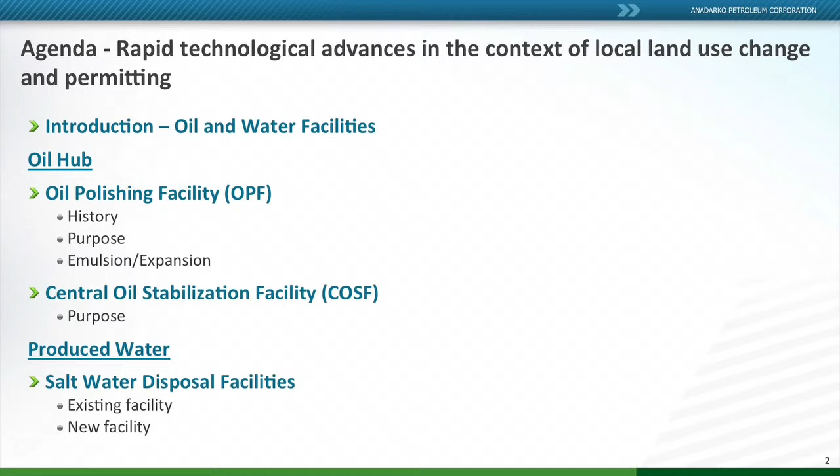Second topic I'll talk about is the central oil stabilization facility. That's a site that's currently under construction right now, and it's one of those big facilities that's helping us be better neighbors, better producers, so our tank batteries become smaller, more efficient, no VRUs, and a lot less emissions. Great story there. And I'll talk about our produced water system. We've got an existing facility as well as a new one, and some of the new technology we're bringing into each one of those three.

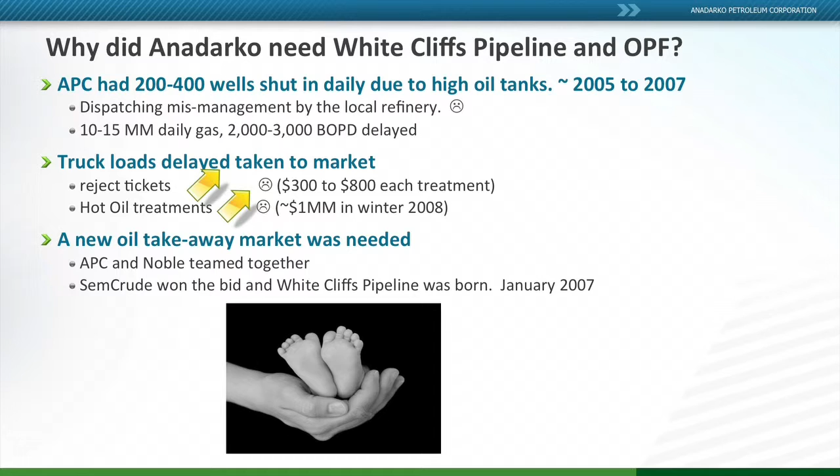So why did Anadarko need a White Cliffs pipeline and an oil polishing facility? Back in 2005 to 7, we had a bunch of wells that were shut in because the local refinery wanted to have control of trucking this oil, and all they did was come up with excuses on why they couldn't haul that oil. Cost us a lot of money, a lot of shut-in production. So us and our counterpart Noble came up with the idea that we need a better way to get our oil to the market. So we went out to bid, and the idea of the White Cliffs pipeline was born back in 2007.

So what the oil polishing facility does: when the trucks offload, about 10% of it doesn't meet the spec that has to go into the pipeline. So we divert it and bring it back to polish it. Basically, the bad actor there is just a little bit of water, especially in the wintertime when it was cold. We're talking about trucking oil right now, but remember this is back in the 2007-8 time frame, and since then we've eliminated a lot of trucks. I'll get to that later.

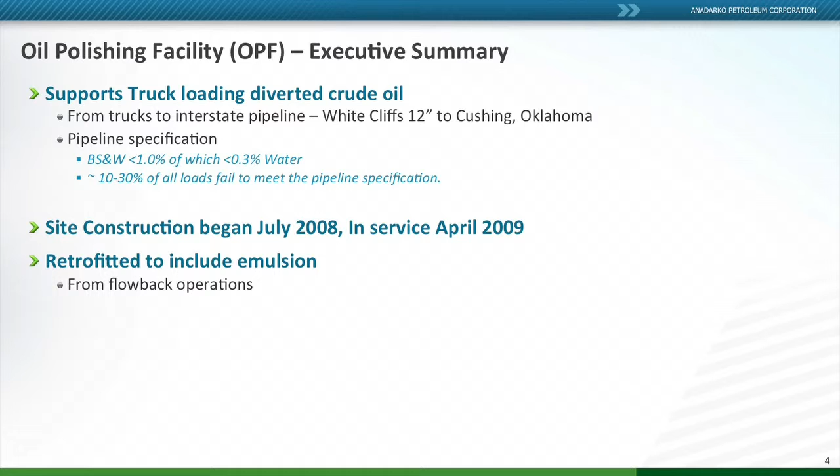So the pipeline spec is no more than 1% BS&W, which can be no more than 0.3. That's kind of tight, but when you've got some paraffin in there and you've got cold weather, you just can't get that water out of it. So we began the construction in July of 2008, got online in 2009, and the facility itself has been working fine.

We wanted to do a retrofit to it because we wanted to bring some emulsion in from our flowback operation. When you frack a well, you get that water that's coming back, and that's what we call the flowback process. And inside there's a little bit of oil and emulsion. Previously, we were taking that to a water disposal facility, and they were charging us to take it as well as skimming the oil and making money from that. So we decided to retrofit one of our sites.

Kind of a complicated flow diagram here. The trucks show up, they offload, about 10% is out of spec. We process it and then we pump it back into it.

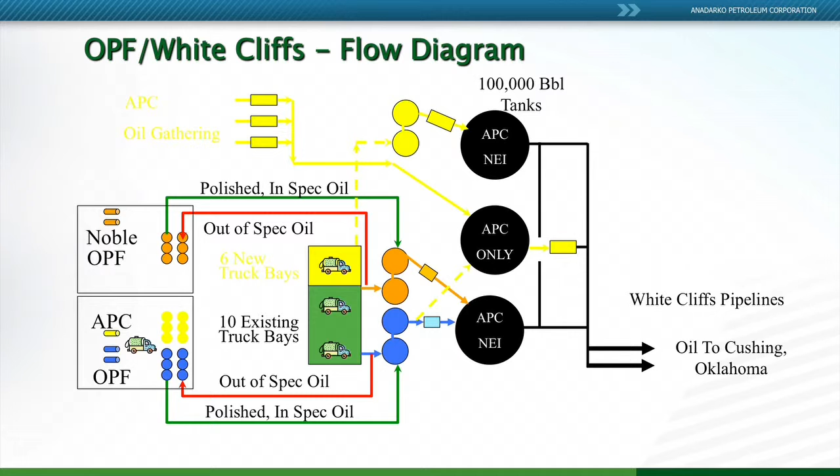And currently, right now, our oil is being pumped to Cushing, Oklahoma through 2 pipelines. We also have a railroad spur. I didn't show it up here. And then as the horizontal program came on, we knew we had to have a better takeaway, a better way to get our oil to market, and that was through an oil gathering system. So currently we have over 150 miles of anywhere from 8-inch to 12-inch trunk lines that gather our oil, and that's been a great story as well. I'll get to that a little bit later.

Noble has a sister site just like ours, and it's called an oil polishing facility as well. Just a couple of photos here. Here's some water tanks, and they're fiberglass. So a lot of this is not technology. It's good use of what materials are out there for us to use. We want to use fiberglass so we don't get corrosion, because this produced water in these tanks can corrode. We don't want leaks or spills.

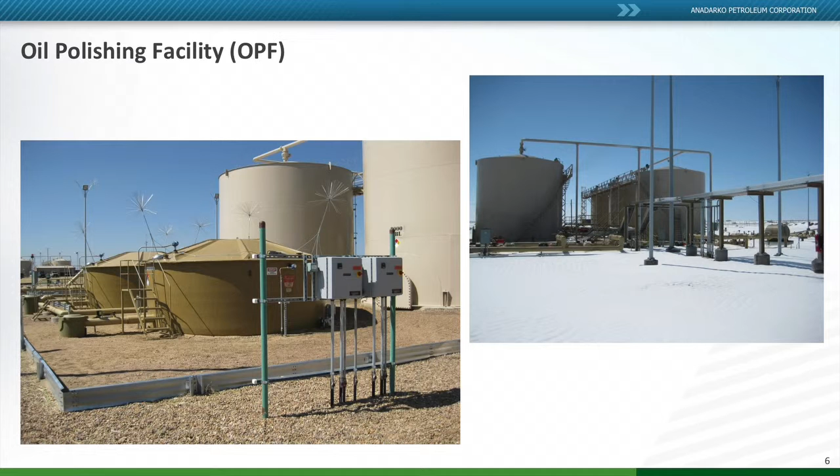With that, though, with hydrocarbons inside plastic, you can get some static and you can get some fires, so what we do is we put a really robust system in place for the grounding and also for lightning suppression. So these little fuzzy things on top are protecting the whole site from any kind of a lightning strike. And recently, if you've seen in the papers, about 2 or 3 weeks ago, there was a lightning strike that took a water disposal facility down. It wasn't ours, but I'm not sure if they had or hadn't done the right thing, which is putting lightning suppression in place.

The site, when it was a green field, looked like that, and now it looks similar to that. It's even expanding year after year as more oil shows up from this horizontal program. Just kind of an example of what we want to do for an expansion. We want to put in another emulsion offloading rack, just adding some more tankage and another line heater to help us polish that oil a little bit better.

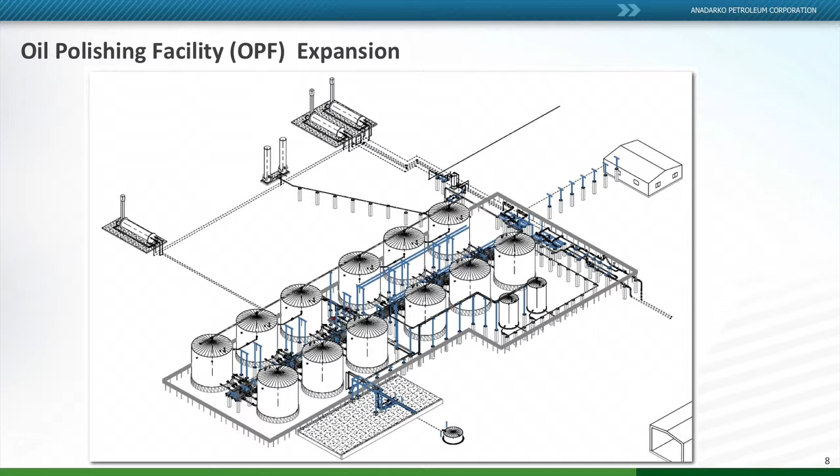So since the vertical program, and now we're evolving into the horizontal program, we also wanted to get away from having a lot of atmospheric storage tanks of the oil on site. So we're moving into a thing called tankless, or pressurized storage of our oil. The oil we get in the Weld County, DJ Basin, Wattenberg area is very flashy. It's a condensate light oil. So there's a lot of gas that wants to come out of there, especially as you drop the pressures, more gas evolves and natural gas liquids come out.

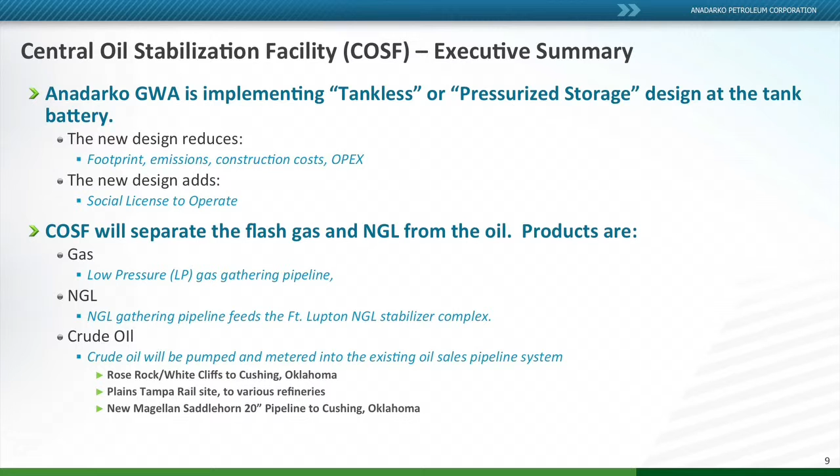We're changing the way that we process at our tank batteries, and we're going to tankless, like I mentioned earlier. What that tankless system does is it eliminates a lot of vapor recovery units and equipment on site, but it keeps all that oil stored in a pressurized mode. What that does will help reduce our footprint, and it will help reduce our emissions significantly. Our construction costs go down and our operating costs go down as well.

We have a thing called the social license to operate, and we really respect what our neighbors think of us, and we really want to improve on the bad-actor view of oil and gas. So this is what we're doing. We're taking some big major leaps and big steps in technological advances with the help of Weld County and everybody else.

So as a result of changing our tank batteries around, we have a lot of natural gas and natural gas liquids that will still be entrained in that oil as it gets pumped through our oil gathering system, and we still have to knock that out. So this is what the Central Oil Stabilization Facility is going to do. It's going to help knock out some more of the natural gas as well as the natural gas liquids.

So at this central processing facility, those will be our products. We'll have natural gas going into our natural gas gathering system. We'll have natural gas liquids that will stay liquid, be pressurized, and we'll pump that into our natural gas liquids pipeline. And then our oil will now be a little bit lower Reid vapor pressure, yet we're going to pump it right back into our oil sales system, which is 2 pipelines to Cushing, as well as a railroad takeaway system. In the future, 2016, we've got another 20-inch pipeline going out of the DJ Basin area to Cushing, Oklahoma, that we're partnered with Magellan and Plains on.

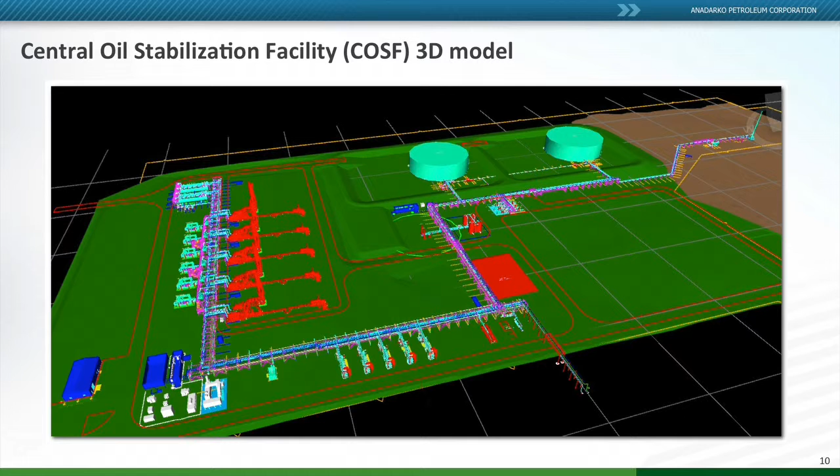Our stable oil comes back around, and we've got 250,000 barrel storage tanks now that we have in place. One tank will be online, just operating. We're going to keep that tank level steady, and the other one's just in standby in case we have some upsets or any other kind of conditions.

We'll then go ahead and pump that oil out, and then we'll go back into, like I talked about earlier, our oil sales system. So that kind of makes our Central Oil Stabilization Facility. And again, this is about 60 to 70% constructed, and we should be turning the system on in the July, August timeframe.

Talked about some major equipment there, the big tanks. On those big tanks, they are lightning protected, as well as I got a fire suppression system in there. Again, we want to be a good neighbor. If those tanks were to ever catch on fire, we can put it out in about 2 minutes. So we've got a lot of things that we can utilize at our disposal.

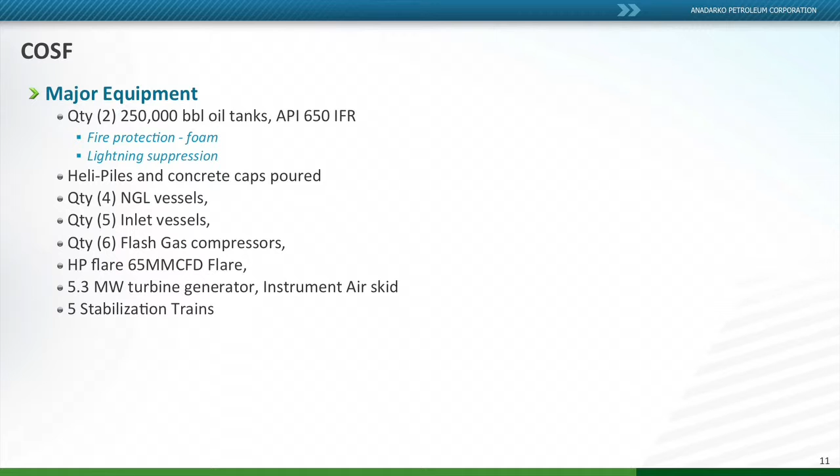We have our own water on demand system that is going to be the charge water for that foaming agent that'll put those tanks out. Again, NGL vessels, inlet vessels, flash gas compressors, and 5 trains. And we do have backup electric power out there just to keep that thing going. It's going to have to run 24/7.

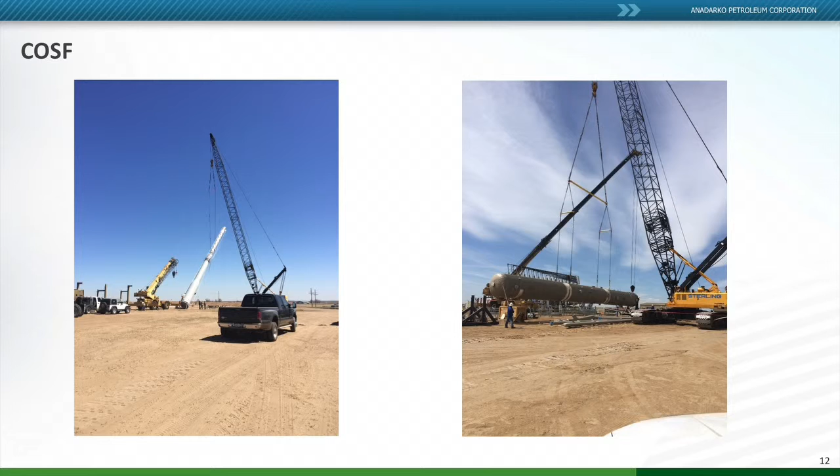Talked about what we're doing in the Wattenberg area with our oil gathering system. So we did turn the system on back in June of 2012, and we had to put in an oil gathering system because of the massive volume that was coming, and we just didn't want to truck it out. Can you imagine moving a lot of oil like that through truck? Our main goal is to reduce the truck traffic, and that's what we've done so far.

So since 2012, we've moved almost 43 million barrels now at this point, and that's equivalent to 230,000 plus truck trips. So this is one of those things that we out of necessity did, as well as we had a benefit from it. And again, this is data that came from the beginning of the month. And just this first part of the month with our new production coming on, we've eliminated 46,000 truckloads.

That oil polishing facility, it's treated up to 155,000 barrels of emulsion slash watery liquid that we wanted to take care of. Last year in March, we thought we were doing great. We moved 2 million barrels through our gathering system. Now we've moved over 3.2.

And again, this is with the new technology at our tank batteries where everything's pressurized and sealed, so we're not getting as many emissions, as well as we're reducing the risk to the public with not having oil trucks on the roads. We're currently doing about 103,000 barrels out of that Wattenberg field, which is inside the DJ Basin.

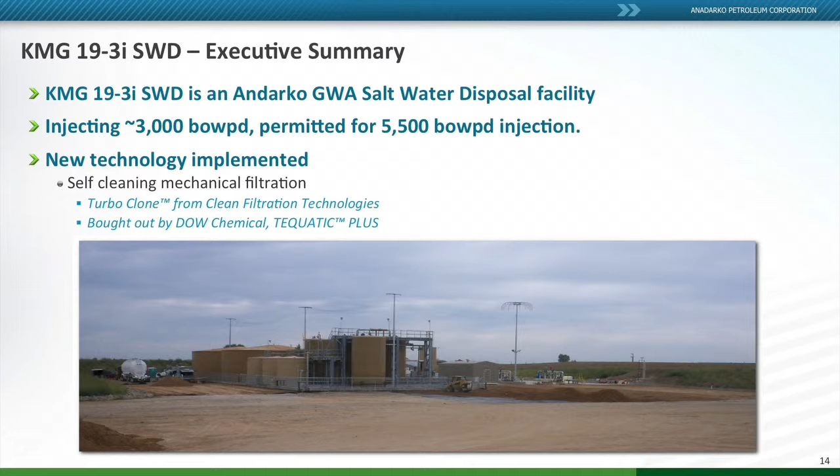One technology that I brought into this service is a self-cleaning mechanical filter, because it seemed like everybody didn't know what to do with the solids that come out of the salt water. You get sand, you get little particles of steel and iron and rust and that kind of stuff. And so I brought in a new technology. It was called a Turbo Clone at the time, and Dow Chemical bought them out. That's called a TEQUATIC PLUS. It's been working great for us.

And I really think that the way these filters work, these particles move around the screen pretty fast. They bump into these little slits that are 35 micron to 50 micron wide. And every time they bump into a slit, that little piece of that oil or that wax breaks off. And that helps now to separate the solid and the oil a little bit better. So we're seeing some great results with using that filter.

So as a result of that, we're building another saltwater disposal facility kind of north of the Hudson area. And we've got some new improvements as well. We drilled a well, and it's capable of taking about 17,000 barrels of water a day. And we're only permitted from the state to do 10,000 barrels a day. I think that's that magic number they're comfortable with, so as not to cause any seismic events.

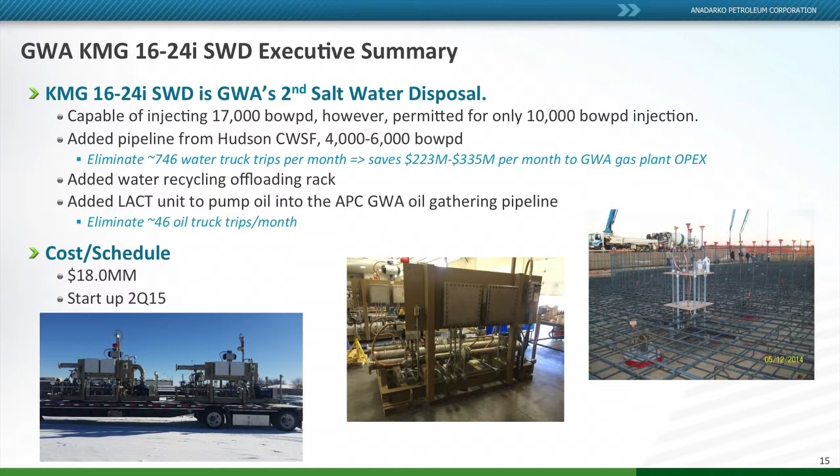We did add a water pipeline, so this was great. We were encouraged by Director Lepore to see if we can do anything with reducing the amount of trucks and if we can pipeline our produced water. So this was a great opportunity. So all of our compressor stations that have any kind of water, we gather that, we pipe it together into this facility, and that'll save us like 750 water trucks per month. So there's an economic advantage as well as a safety risk reduction to the public of taking that many trucks off of there. So again, there's an economic incentive for us as well as public risk goes way down.

We also added a water recycling offloading rack there. So basically, we can skim the produced water, we get the solids out of it, we get the oil out of it, and we can pump it back into a truck and take that to our next hydraulic fracture. And also, we've added a LACT unit, so we're going to pump the oil off the site into an oil gathering system that's already existing. So we've reduced trucks as well there. So the name of the game here is get the trucks off the road. And we should be starting this thing up in the June, July timeframe as well. And if anybody's going to ask, are we going to do lightning suppression on this one? Absolutely.